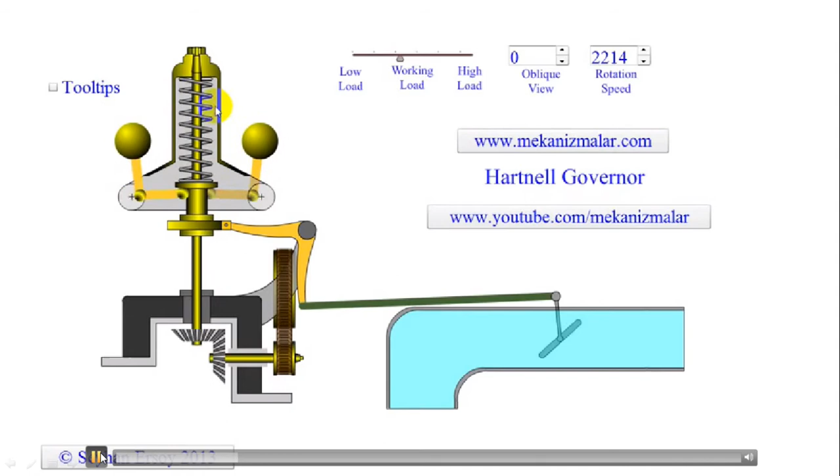Do you understand how the Hartnell governor works? This is just a small animation to show how the Hartnell governor works. If you straight away look at the diagram, you will not understand, so that's why I have shown you a small animation for the Hartnell governor.

Now we will look at the Hartnell governor, which is a spring-loaded governor as shown in the figure. This is a normal diagram of a Hartnell governor. What are all the things present there? This bell crank lever is very important in a Hartnell governor. This L shape swings about this point O. That is very important, and similarly on this side also.

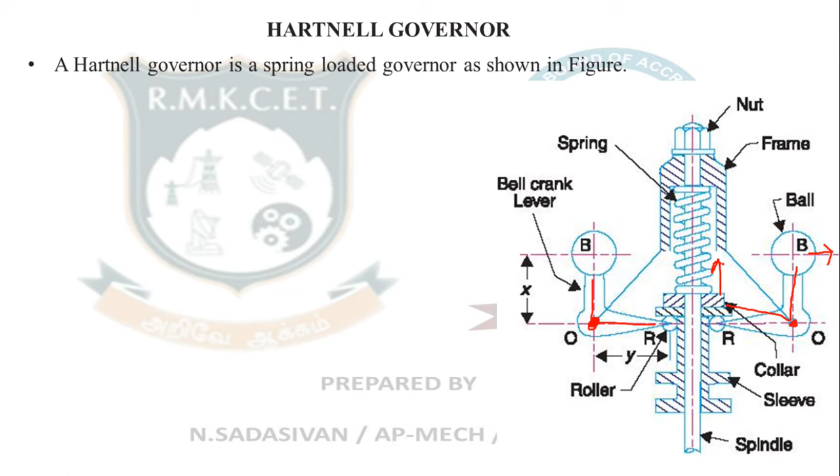When the centrifugal force increases, the L shape will tend to become like this and lift the sleeve upward. That's how a Hartnell governor works. It is supposed to be one of the most efficient governors of all the four you have studied: Watt governor, Porter, Proell, and Hartnell. Hartnell is more efficient than all the other three.

It consists of a bell crank lever pivoted at the points O to the frame. The frame is attached to the governor spindle, therefore rotates with it. Each lever carries a ball at the end of the vertical arm, and a roller at the lower portion where the bell crank lever touches the sleeve. This roller will adjust for the friction.

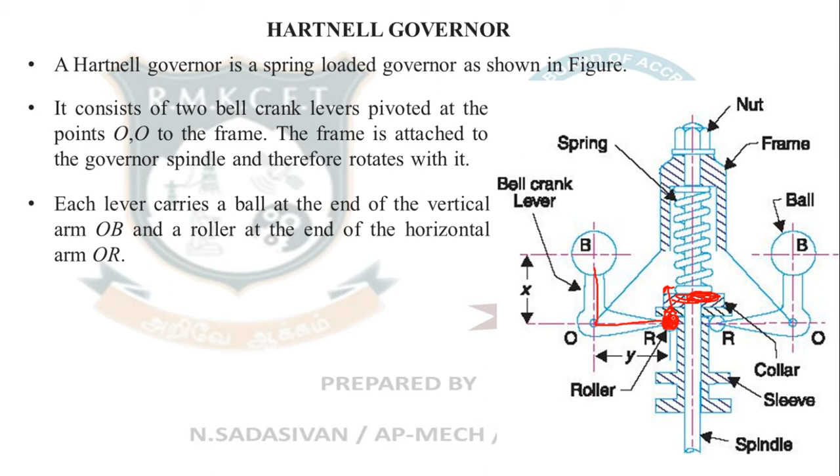Whenever you want to push the sleeve upwards, the sleeve is actually rotating, it is not at rest. Therefore, you cannot straight away touch the bell crank lever to a rotating sleeve. You have a roller in between which allows the relative motion but still conveys the input of the bell crank lever, whether to lift the sleeve or move it downwards.

A helical spring in compression provides equal downward force on the two rollers. This is the loaded spring, which provides calibration on how much force is required to move the sleeve upwards or downwards. The stiffness of the spring can be adjusted by tightening this nut. If you tighten the nut, the spring becomes stiffer; if you make it loose, the spring becomes less stiff. It is a variable stiffness spring.

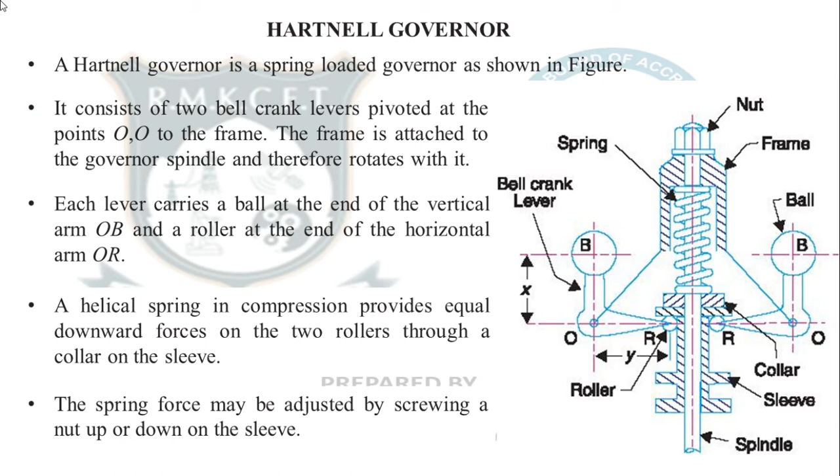Spring force may be adjusted by screwing the nut up or down. So let m equal mass of the balls in kilograms, and M equal mass of the sleeve. These are the two extreme positions of the Hartnell governor, and one of the bell crank lever arms is shown. The free body diagram will have only one bell crank lever arm with its ball.

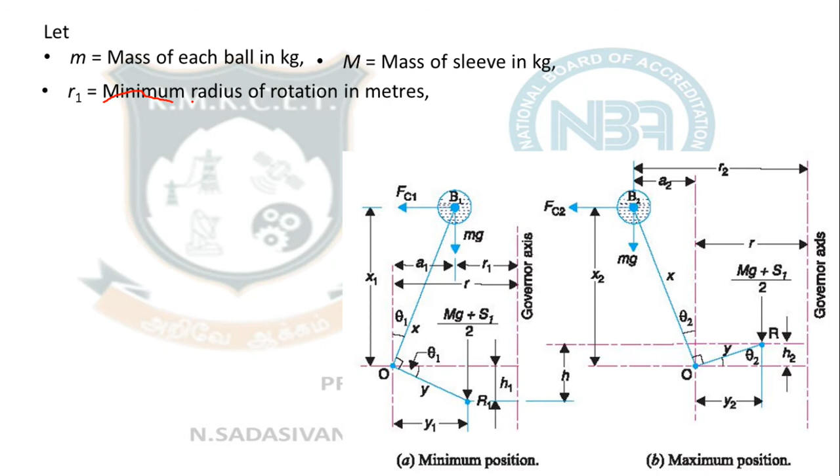So r1 equals minimum radius of rotation in meters. Carefully see, when your Hartnell governor is going very slow, the ball will be in the most innermost position. What is this r1? Look here, this is your ball center line to the governor axis. It is not even equal to this length.

This is your bell crank lever, and the ball is here. When you are going very slow, it comes in, so the radius of rotation from the governor axis becomes even smaller than the length of your bell crank lever. It is very small. For the extreme high speed case, your radius of rotation becomes larger than the length of the horizontal portion of the L.

So r1 equals minimum radius, the innermost ball position, ball center to governor axis. One thing to remember is it is lesser than Y. Y is the horizontal length of the bell crank lever, and X is the vertical length of the bell crank lever. You have to keep X and Y in mind very carefully when looking at a Hartnell governor.

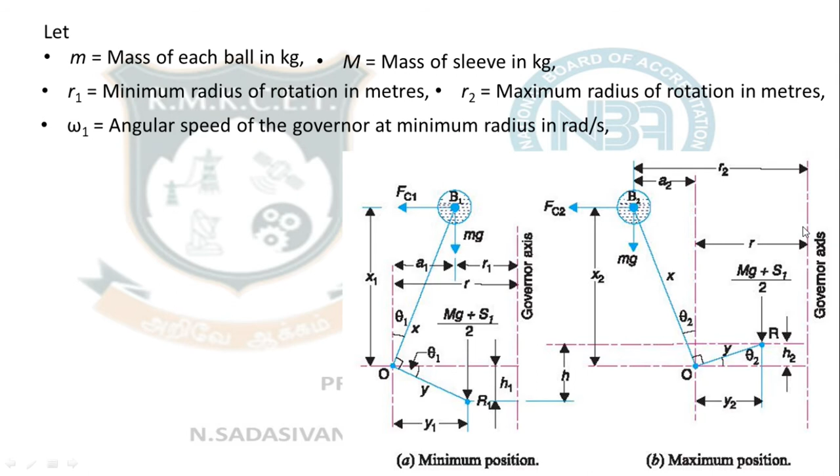R2 is equal to maximum radius of rotation, same on this side as I told you earlier. When the ball goes to the outermost extreme position, the distance from ball center to the governor axis is R2. Omega 1 is angular speed of the governor at minimum radius.

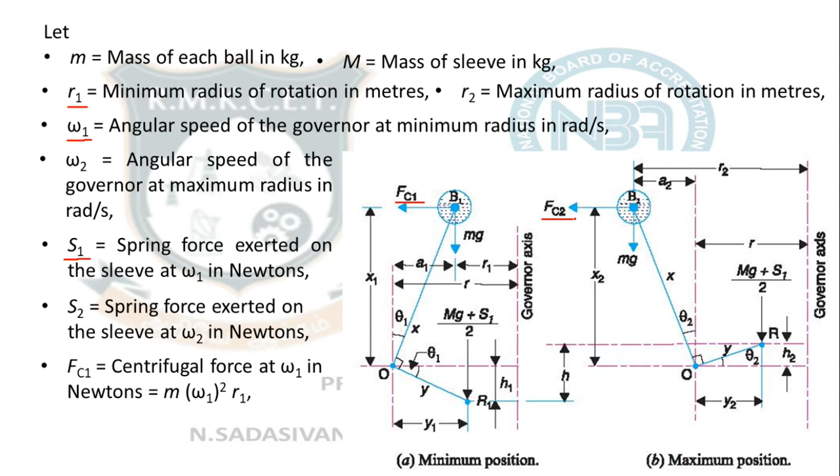Omega 2 is the maximum speed corresponding to R2. S1 is the spring force exerted during the omega 1 speed. When the governor is rotating at this radius at speed omega 1, the downward force exerted by the central spring on the sleeve is called S1. Similarly, S2 is the force at the omega 2 position. FC1 and FC2 are the two centrifugal forces at omega 1 and omega 2.

S is equal to stiffness of the spring. This central spindle spring has stiffness small s. X and Y I have already told you: bell crank lever vertical length is X, horizontal length is Y. R is equal to radius of the fulcrum from the governor axis. This is point O.

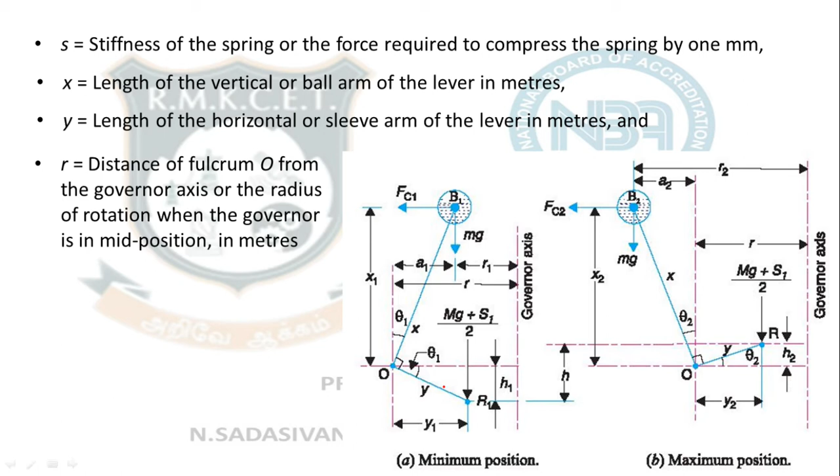For the minimum position, consider the forces acting on one bell crank lever. Minimum and maximum positions are shown below; first I have shown the minimum position. The radius of rotation changes from R1 at the minimum position to R2 at the maximum position. Always the radius of rotation is measured from the ball center to the governor axis.

For any governor, at minimum position, when the radius of rotation changes from R to R1, what is R? R is the radius of rotation in the theoretically horizontal position. R is the distance between fulcrum point O and the governor axis. As the speed reduces, the radius of rotation reduces from R to R1, as shown in figure A below.

The compression of the spring or lift of the sleeve is H1. This much the sleeve goes down. Otherwise, in reverse, your fuel supply will be reduced if the sleeve goes down. So H1 is given by...

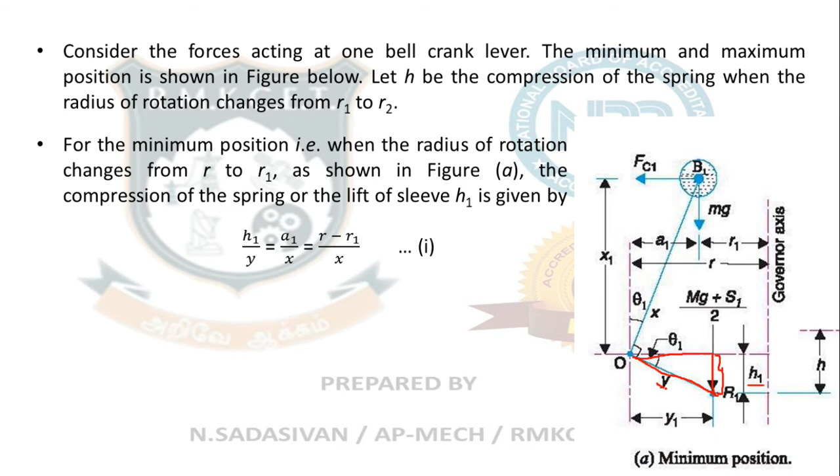H1 by Y, let's take this triangle. H1 by hypotenuse Y. This is a similar triangle because they have two angles equal and the sides are parallel. So H1 by Y equals A1 by X.

What is A1? It's the difference in radius from R to R1, so R minus R1 is A1. So A1 by X, the hypotenuse, gives H1 by Y equal to A1 by X, the similar triangle relationship, where A1 equals R minus R1. Let's keep that as equation 1.

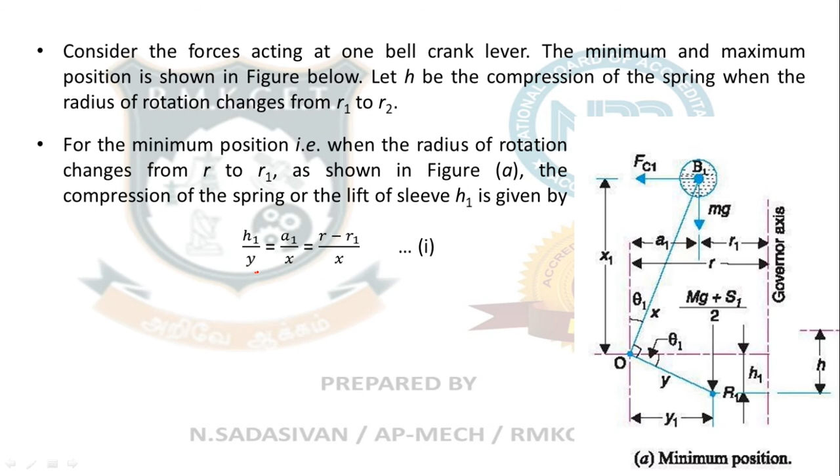Similarly, for the maximum position, H2 by Y equals A2 by X equals R2 minus R by X, because here R2 is greater than R. In the theoretically horizontal position of the bell crank lever the radius is R, so R2 minus R becomes A2, giving A2 by X by similar triangle comparison, for the maximum position.

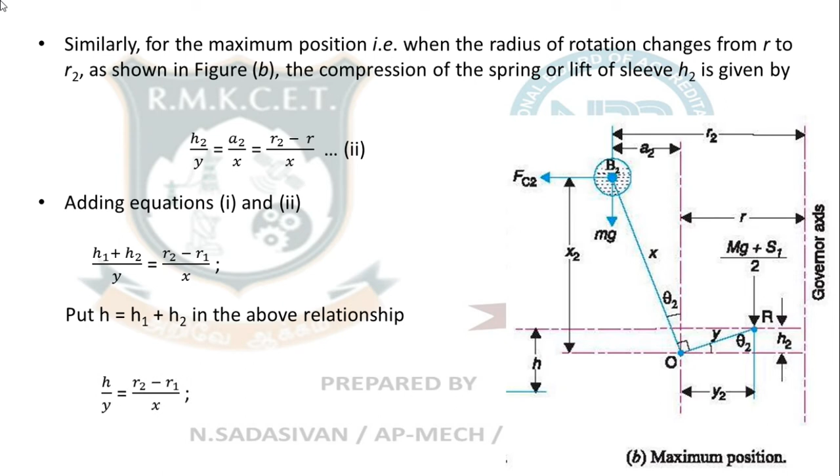Adding equations 1 and 2: H1 plus H2 by Y equals R minus R1 divided by X plus R2 minus R by X. The R and R cancel, giving R2 minus R1 by X. Putting H equal to H1 plus H2, we get H by Y equal to R2 minus R1 by X, so cross multiplying, R2 minus R1 into Y by X is equal to H.

For the minimum position, taking moment about O: here Mg plus S1 by 2, multiplied by Y1, where Y1 is this perpendicular distance. So capital Mg plus spring stiffness S1 divided by 2, half of that acting here, not just sleeve mass but along with spring stiffness is acting. Therefore Mg plus S1 by 2 into the perpendicular distance from O, which is Y1, plus ball mass at a distance A1 from point O, the perpendicular distance.

So Mg into A1 equal to, these two are going around in clockwise direction. If you rotate this force about O, it will go clockwise, this will go clockwise, but the centrifugal force will go anti-clockwise. Therefore it will come on the other side of the equation with a different symbol: Fc into x1, this length. Now rearrange and do mathematical manipulation.

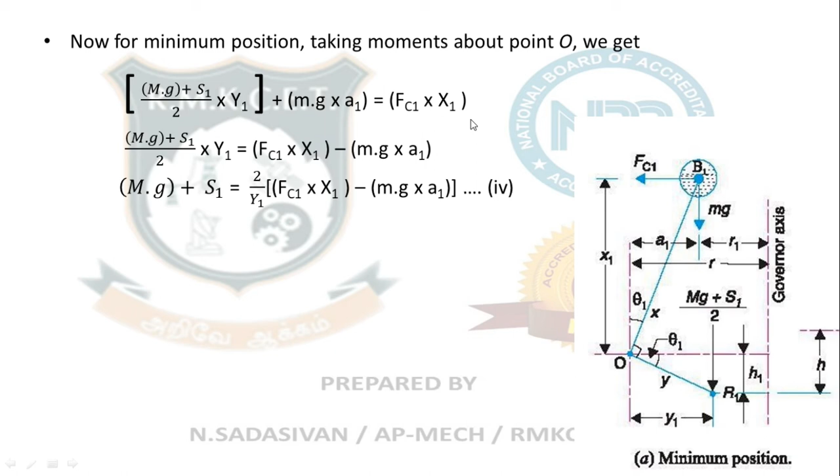All that you will get one equation like this. Keep it as it is. Mg plus S1 equal to 2 by y1 into Fc1 into x1 minus mg into a1. So now I am taking the maximum position.

Same thing by taking moment, I am rearranging and writing equation 5: Mg plus S2 equal to 2 by y2 into Fc2 into x2 minus mg into a2.

Subtracting equation 4 from equation 5. So this is equation 4, equation 5, subtract 4 from 5. You rearrange everything, you can cancel this mg and mg. S2 minus S1 you will get an equation: S2 minus S1 equal to 2 by y2 Fc2. This whole thing will be as it is, keep it as it is. Only this mg and mg will get eliminated. This entire thing minus this entire thing, as it is I am writing. Same thing is written here.

So we know that S2 minus S1 equal to change in height into stiffness of the spring is the difference in load due to the spindle spring. And H is equal to R2 minus R1 into y by x. So S is equal to S2 minus S1 by H.

So this I am rearranging. Spring stiffness equal to, just send this H to the denominator, so instead of H you substitute this here. So H is equal to R2 minus R1 in the above expression. Your expression changes and you are obtaining the spring stiffness expression.

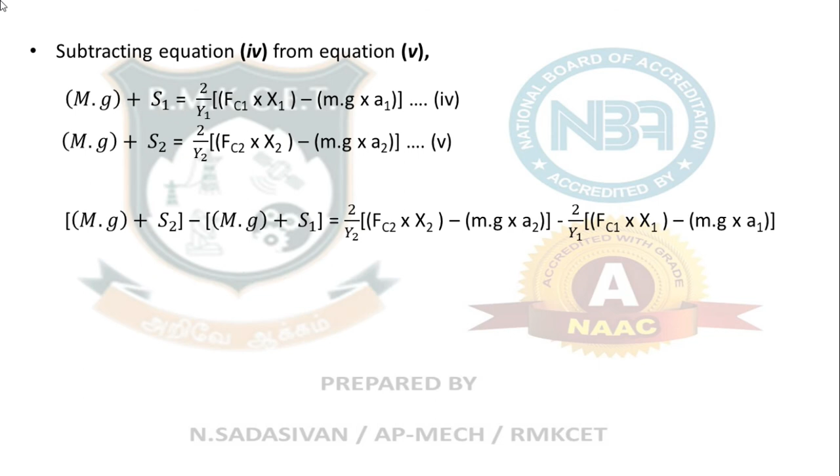Neglecting the obliquity effect. What is obliquity? The change in the length. Let's go back to this diagram, you will understand. Let's look in this diagram.

What is the value of x2? X2 is the vertical height. So if initially my bell crank lever is like this, now it is like this, the higher speed position. What is this vertical height? This is x, I know. This is x, this is y. Now this is x2, just the vertical height alone you have to take.

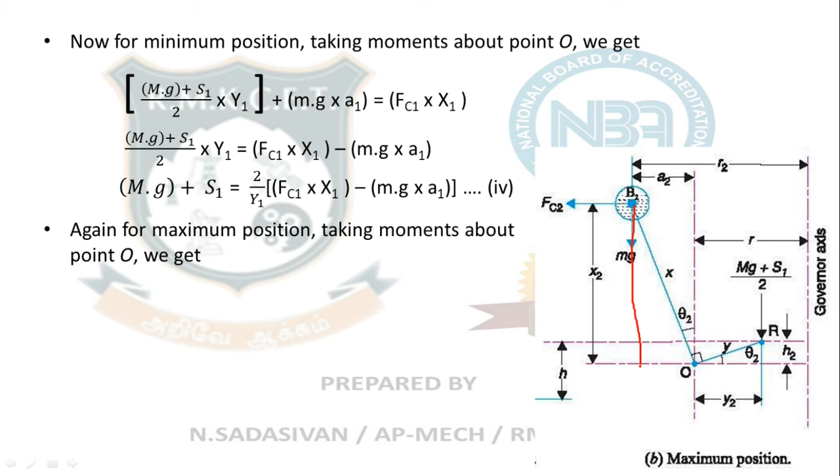Now the difference between this x and x2 and x1 is neglected. Obliquity neglected means the change in vertical distance of the ball from the fulcrum point due to the centrifugal force is neglected. That's what I am telling. Always in Hartnell governor we neglect obliquity unless it is specified in the question directly. So x1 equal to x2 equal to x.

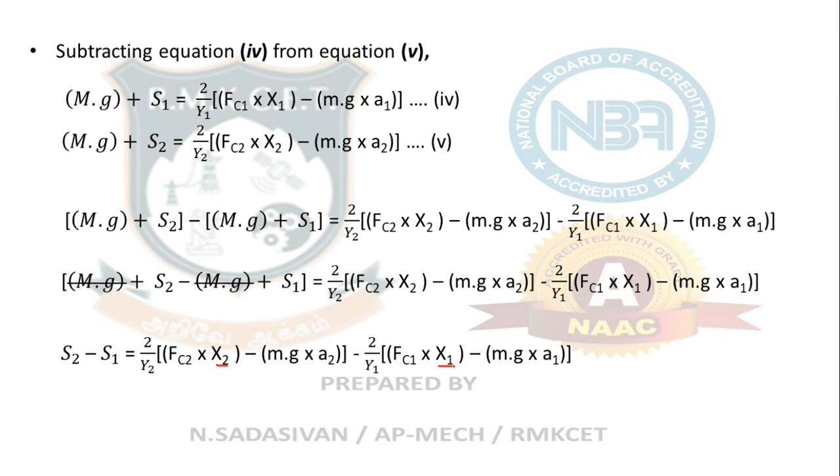So in this previous slide expressions, what I am going to do is write x2 as x, x1 as x, and this is neglected. The ball mass effect is neglected. So now I am rearranging this equation.

And moment due to the weight of the ball is also neglected. So for the minimum position, x1 becomes x and the mg component vanishes. So this is the equation you are getting: y1 becomes y, x1 becomes x, that minus mg component vanishes. It's a simplification. So mg plus s1 equal to 2 into fc1 into x by y. That is equation 6, keep it as it is.

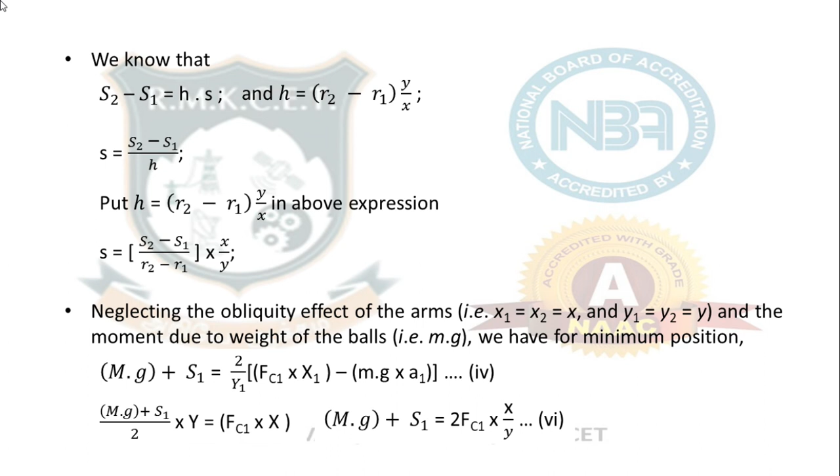Similarly for the maximum position, I will get mg plus s2 equal to 2 into fc2 into x by y. So subtracting these two equations, 6 from 7, what will happen? S2 minus S1 equal to 2, FC2 minus FC1, into X by Y. Do you get it? Difference in force exerted by the spring equal to 2 times the centrifugal force in the two cases into X by Y. X by Y is the ratio of the bell crank lever arms.

This is X, this is Y, the bell crank lever arms. So depending on this ratio, your centrifugal force varies twice. So that is S1, S is the load exerted, S2 is the load exerted in the second speed by the spindle spring. First case, spindle spring S1.

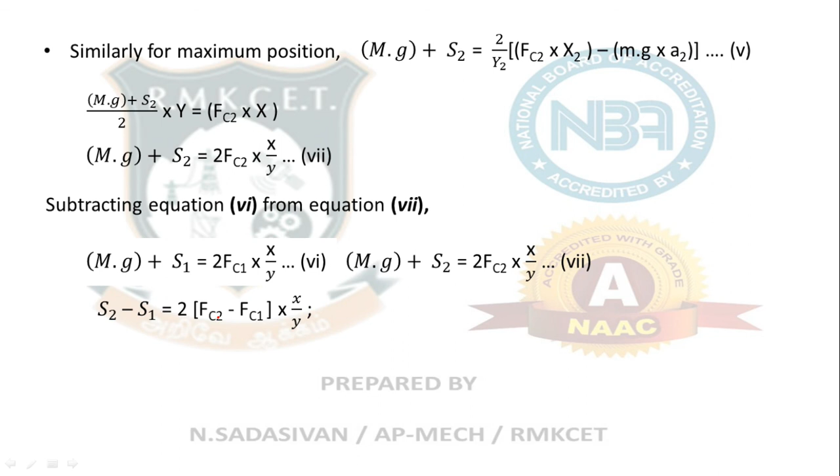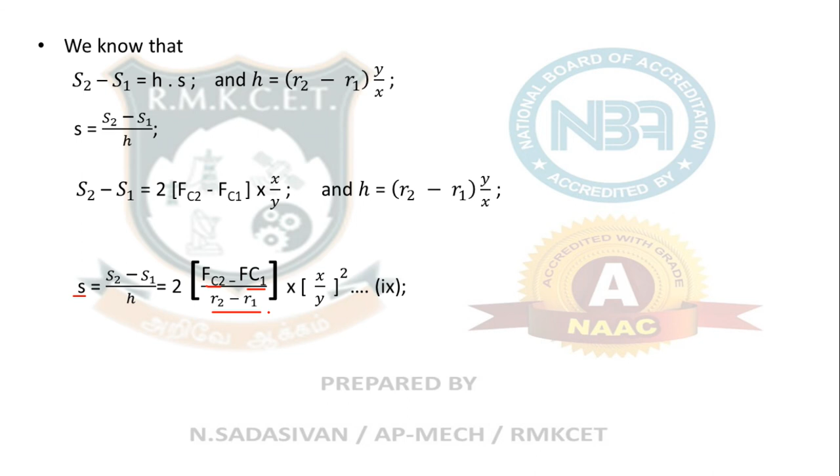Same thing you substitute again here, you get 2 into FC2 minus FC1, R2 minus R1, X by Y the whole square. This is your stiffness formula. Have a note of this formula: Spring stiffness equal to 2 times of Fc2 minus Fc1 divided by R2 minus R1 into X by Y the whole square. This is your final stiffness of the spindle spring formula.

So there are some special notes for you. Unless otherwise specified, obliquity is always neglected. When friction comes into the formula, your capital M sleeve mass plus or minus F is taken, and how to put plus and minus you already know as usual.

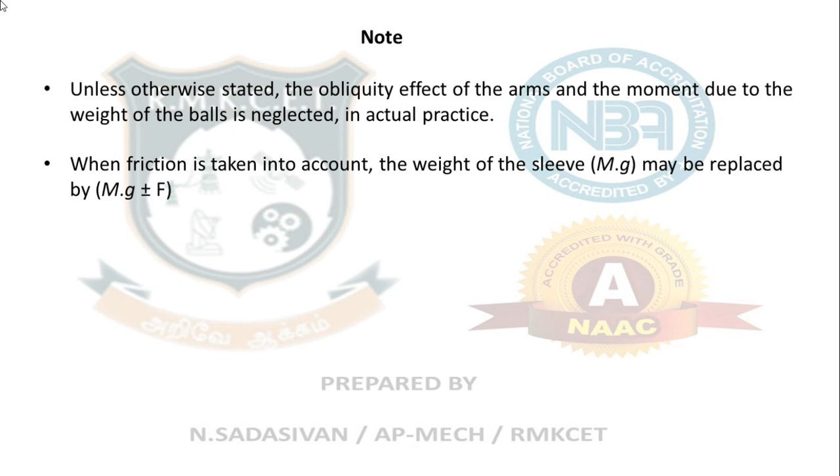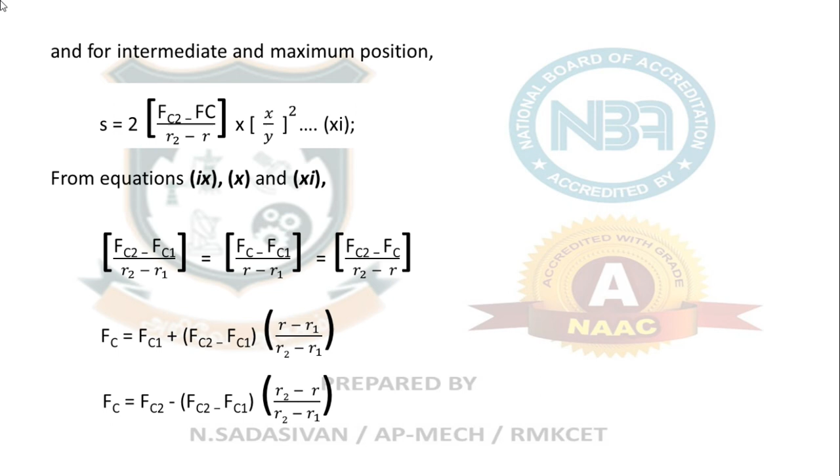The centrifugal force in any intermediate position can be calculated by the following way. So these three equations I am taking and rearranging, and I can write like this: Fc equal to Fc2 minus Fc1 into R2 minus R by... So this we will see when we are doing the problem. So that completes your Hartnell governor introduction. This is taken from your Khurmi textbook, section 18.8.